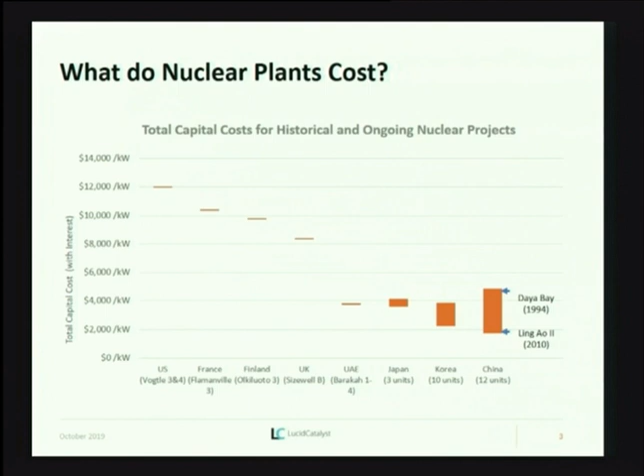So what drives these cost outcomes? Is it because labor is cheap in China or because corners are being cut on safety? Well, our study set out to really understand what drives the cost of nuclear and to establish what, if any, best practices could be transferred to the UK or to the US context. Now, Tony's really helpfully introduced the concept here of the benchmark plant, which, as he said, was based on the EEDB database of tens of plants that were built in the United States with very detailed cost data.

And you can see here that we've given a breakdown of what the high-level costs are, including interest during construction, which for the purposes of our study we set at 7% across all the plants that we reviewed, and we brought all of the plants up to 2017 dollars. But we also have owner's costs, and you can see that big blue piece there is indirect services costs, which are things like, for example, interaction with the regulator, design engineering, those sorts of costs. And then we have labor, we have equipment and materials, and then a small amount of pre-construction costs.

It's worth saying that we didn't include pre-development costs in our study. So, for example, in the UK, the cost of licensing and gaining planning permission to build on a site, those kinds of costs weren't included in our study.

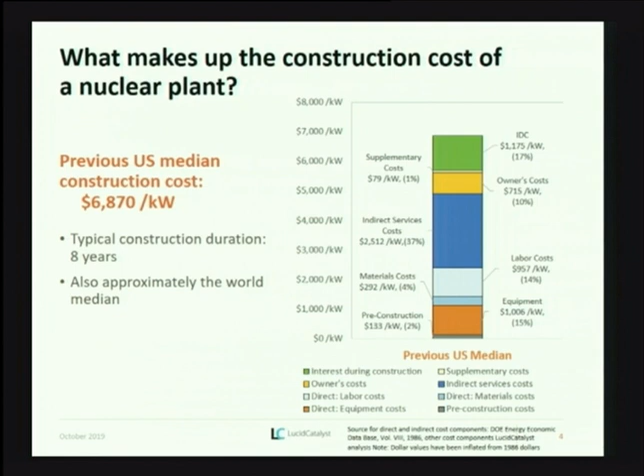We just looked at construction costs, but we did include interest during construction. And actually, it's worth just saying that including interest during construction, even at a levelized cost of 7% across all the plants, is very significant as a driver of cost. And the reason for that is because it depends on how much you borrow and for how long. So your schedule duration and your overall budget will make a very significant difference to your overall cost of financing.

So there's two key insights on this slide now that I'm going to show you. Firstly, first-of-a-kind costs. Now, we've already heard a little bit from Tony about the importance of this. Building something for the first time or doing it in a country for the first time, and for example, after a very prolonged pause, so we would call that like a first-in-a-generation plant, will make it very difficult to implement best practices and achieve high labour productivity. And those are two of the key drivers in the study and throughout the project.

So what you're doing essentially is restarting your industry, and we're seeing that happening today in the United Kingdom, in France, in the United States, in Finland. All of those high-cost plants essentially are first-of-a-kind plants, and as a result we see long construction schedules, we see very high indirect services costs associated with engaging with the regulator and building up the capability and the capacity within the supply chain, achieving the qualifications that are needed, the substantiation of the design. All of that represents a very large investment, especially when you're doing it for the first time.

So you can see here the benchmark plant in the middle, which is about the median for the rest of the world, and then you see the rest of the world plants, and you can see there that actually, interestingly, the equipment and materials, which are the red and the sort of sky blue boxes there, remain broadly consistent across all of the plants. But really the big differentiator is in the interest during construction and the indirect services costs, if you look at the most expensive and the cheapest.

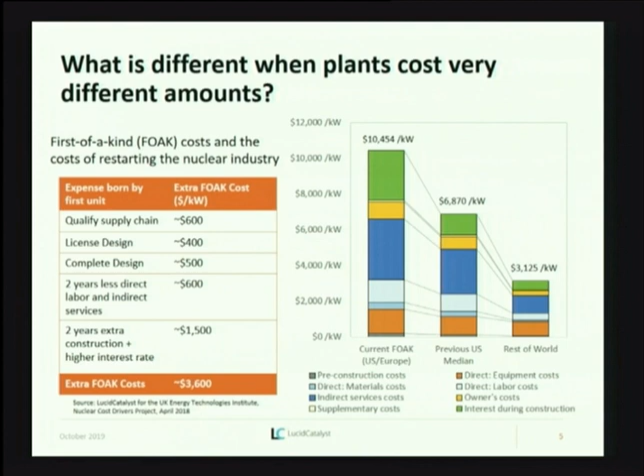So essentially, if you're building an AP1000 in China or an AP1000 in the United States, the cost of equipment and materials will remain broadly the same. What will really differ is your construction schedule and your indirect services costs. And remember, of course, that we levelized the interest during construction, so that wasn't the feature here.

And then even more so, what we see here is the US best experience. Now, from the EEDB database, we took the median experience. But actually, when we went back in to interrogate the data further, what we found was that even the United States was achieving very low cost construction during the height of its new build program. And the significance of this is that achieving very low costs isn't country specific. I've already described how it's not technology specific. You can build an AP1000 in China and the United States and achieve very different outcomes. But actually it's not culturally specific.

The truth is that you can get really good at it in terms of project management, continuity, standardization, having a successful interaction with the safety regulator. And interestingly, a successful interaction with the safety regulator isn't something that we should be afraid of. It's actually something that's to do with having good experience, good judgment, a familiarity with the design, an understanding of the safety case, and all of those result in a more efficient licensing process.

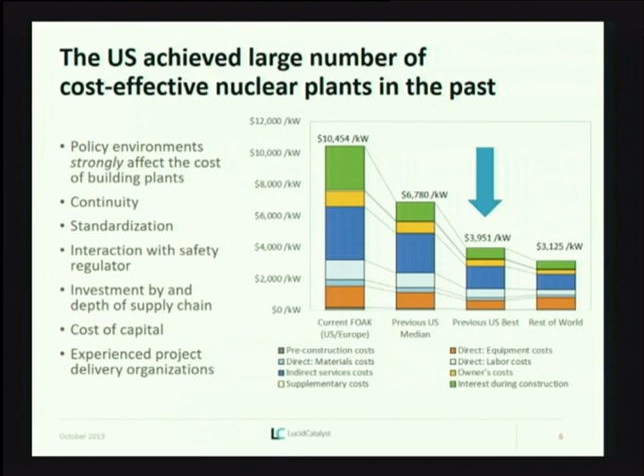Investment in and depth of the supply chain is absolutely critical. The cost for the supply chain and for the developer investing in the supply chain's capability and costs to substantiate designs and to substantiate the safety case of delivering equipment and components is very substantial. Once that investment has been made, if you continue to produce those equipment and materials, then actually you can achieve very efficient cost outcomes. And then, of course, with experienced project delivery organizations, you see an overall increase and benefit of productivity, even in the United States.

So I've described how we can make nuclear cheap through investment in best practices in project management and construction execution; well, we can also make it really expensive. Now, I don't want to dwell too much on these slides because I think Jessica will go into more detail in her presentation here, but we would show some of the data that Jessica's produced where we see very low-cost plants being delivered in the United States and in France.

And then two things happened, Three Mile Island and Chernobyl, and we can see that after those events, those plants that were under construction at the time of those accidents and then underwent very significant regulatory reviews, very substantial design changes midway through construction, ended up with a very significant cost increase.

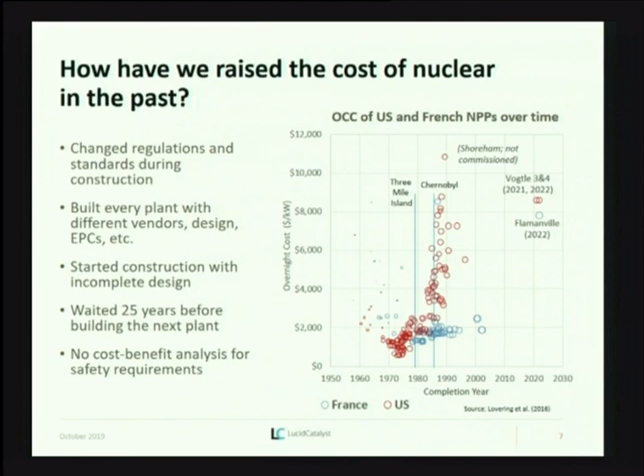So Vogtle is the plant in the United States that's been quite problematic, experiencing very significant delays and cost overruns. But what we're hearing anecdotally is that actually Unit 4 is coming in substantially cheaper than Unit 3, because Unit 3 has really carried the burden of all of those additional costs of setting up the industry, of licensing, of establishing the capability within the supply chain.

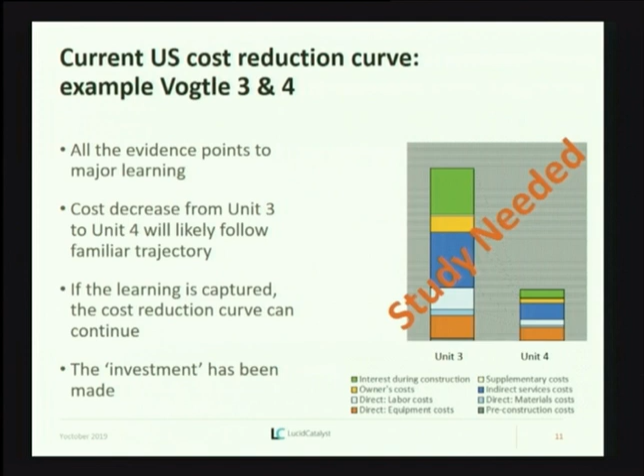We haven't had the opportunity to look into this in detail. A study really is needed. Sorry, I just jumped ahead there.

So this plot, again from Jessica's data, shows how we've actually lowered the cost of nuclear in the past, and you can see here from South Korea and China over the course of their program how they've achieved significant cost reductions from Daya Bay being the first of the Chinese new builds, and then achieving very substantial cost reductions after that by standardizing the design, by investing in the supply chain, by starting construction with a complete design and building continuously.

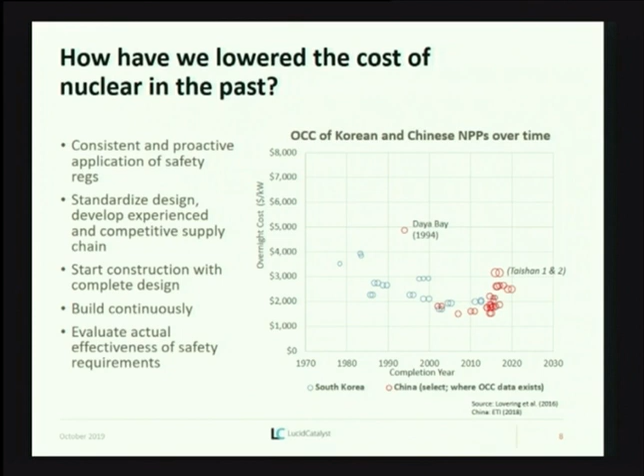Starting construction with a complete design, by the way, if there's one single takeaway from this study, is one of the biggest determinants of a low-cost outcome. All of the high-cost plants that we reviewed started construction with a very low percentage of design completion. And the result of that rippled out into further regulatory investigation during construction, changes on site, delays in developing codes and standards for the supply chain, and ultimately resulting in budget overruns and schedule delays.

So, first-of-a-kind plants are expensive. The best thing that we could do, once we've invested in a high-cost, first-of-a-kind, first-in-a-generation plant, is to build another one. We have to see these first-of-a-kind plants as an investment, and if we do not sequence the subsequent builds, we will lose the capability and the experience that's been gained, the licensing that's been gained, and the longer the gap, the more expensive the next one will be.

And that's really the case that we're making in the UK to the UK government with the build of Hinkley Point C, which by anyone's standard has been an expensive plant, but we ought to see a very substantial cost reduction for the next plant. And here's a case study that illustrates this, which is from Sizewell B, which was the last nuclear plant that we built in the 90s in the United Kingdom.

So our ETI study showed the breakdown of costs that we had from very detailed cost records from the build of Sizewell B up to the blue bar. And then we've since actually added the first-of-a-kind costs that would have also been invested in that plant associated with site acquisition and consents and permitting, the reactor design costs, the cost of licensing, and the additional costs of interest during construction that would have been associated with that.

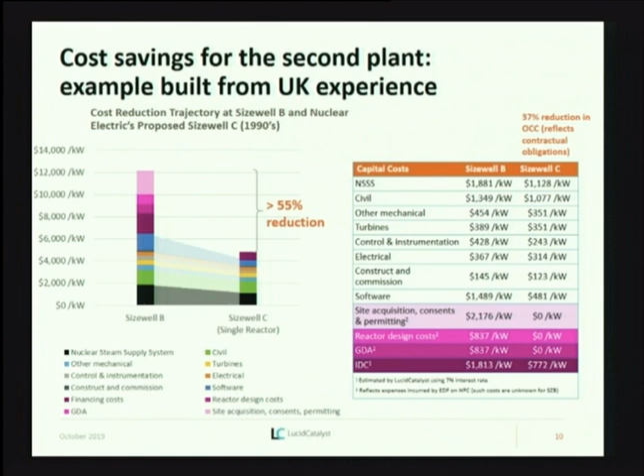Now, that unit unfortunately wasn't built, but it should be a lesson to all of those governments looking at their high first-of-a-kind costs in their countries and deciding whether or not to really maximise that investment by building more plants. Here's another example of a multi-unit program.

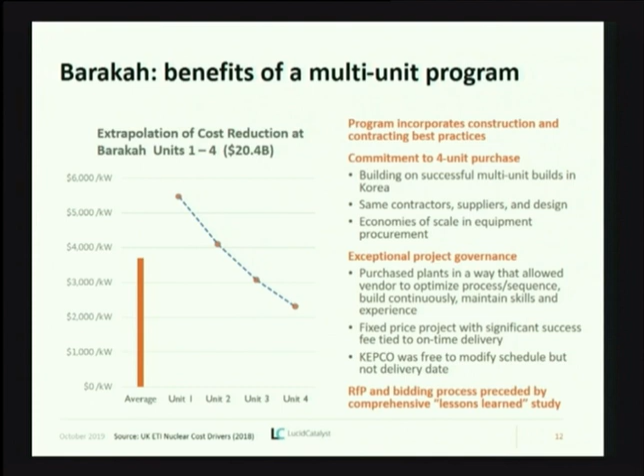Sometimes when we talk about a fleet effect, we think that requires a sort of 10 gigawatt scale commitment from governments, but actually we see a fleet effect even between 1 or 2 units on a single site, or even better, in the case of Barakah, between 1 and 4 units, when you can really start to drive down cost, not only because you're stripping out those first-of-a-kind costs, but you're also starting to really gain the productivity gains and those learning effects within the supply chain and the labour force.

So we know that well-organised programs can reliably deliver low-cost plants. But before I finish, I would just like to highlight 2 additional approaches to cost reduction. So the first of 3, we've heard about improving delivery via a programmatic approach.

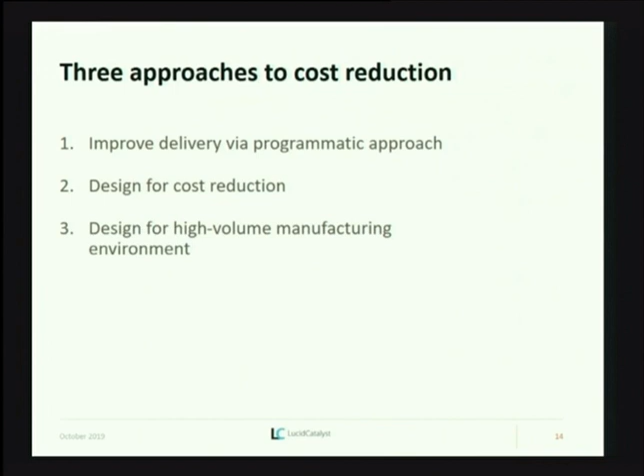We can drive costs down to very competitive levels, even with gigawatt scale, conventionally built, stick-built construction of large light water reactors. And we can do that through continuous building, being disciplined in capturing and disseminating learning, developing a deep competitive supply chain, building as many units per site as possible.

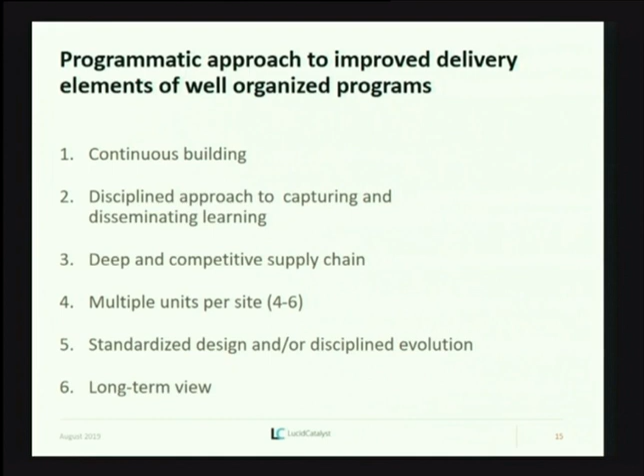In China and Korea, we're seeing 4 to 6 units being built on sites, which is one of the significant drivers of the very low costs that are being achieved in those countries. And then, of course, standardized design and really taking a long-term view. Beyond that, there's other things that we can do to reduce costs on site, such as, for example, seismic isolation.

One of the things that we see, particularly in the UK, for example, is site-specific design. So even when you're intending to replicate your design as much as possible, when you move to a new site, you inevitably need to reopen some of the design case, some of the safety case, which does require additional design engineering, additional interaction with the regulator. Some of those additional costs could be designed out and standardized to avoid site-specific design.

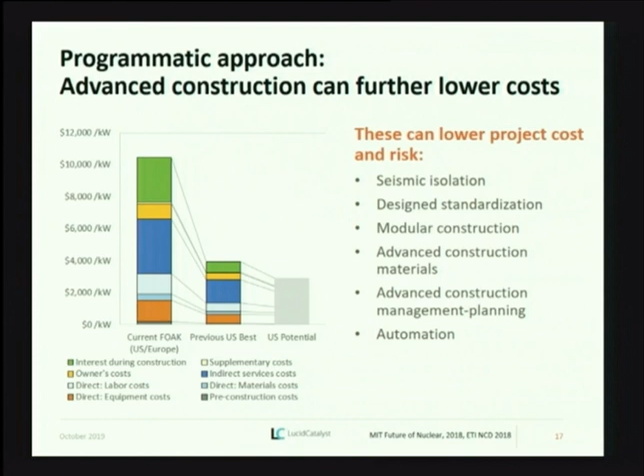We could be redesigning for low-cost delivery for next-generation plants. We're seeing that now in the SMR program. And the SMR plants not only are designing to be factory-built, to be moving from being projects to products, but they're actually designing for low cost.

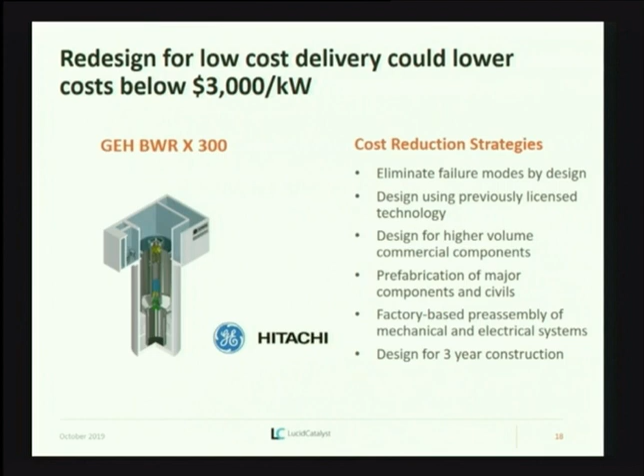This is an example of the GE BWRX-300, which is using as far as possible off-the-shelf components that are very well known, very well demonstrated, and present very little risk in terms of regulatory and licensing, driving out cost and driving shorter construction schedules.

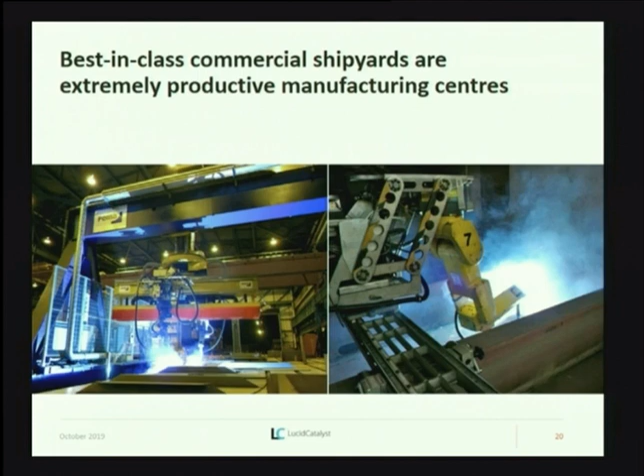We can see this in other sectors that we should be learning from, including, for example, shipyards, which are very productive manufacturing centres. So rather than making these reactors in field, 5,000 guys in a muddy field, why wouldn't we be moving into high manufacturing areas like shipyards that build highly regulated and complex and very large machines?

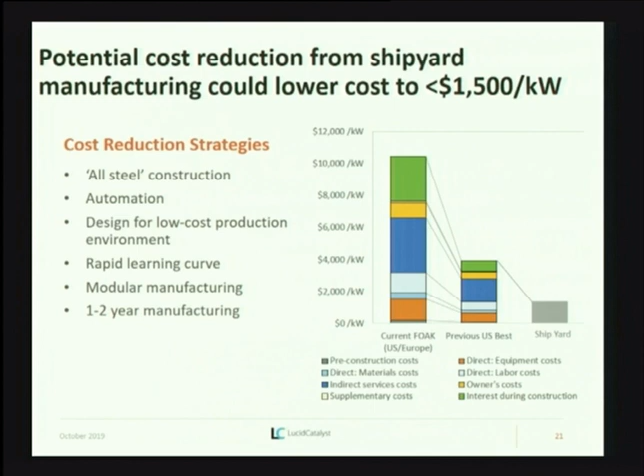So we see potential for very substantial cost reduction through shipyard manufacturing, stripping out costs even further than are intended or well understood at the moment within the SMR space.

And in conclusion, I would say that the largest volume of plants that are being delivered in the world today are actually low cost. There's a very significant gap in the narrative around the cost of nuclear, which is really confined to the context of a small number of first-of-a-kind, first-in-a-generation plants being built in the United States and Europe.

So we need to broaden our horizons and learn from the success that we're seeing in other parts of the world and understanding how many of those best practices are transferable into the United States and the UK. These are very well characterized pathways to lower and potentially very low costs.

And I guess I would leave you with the question with which I started, which is, what would we do differently if we decided to support nuclear with the full range of options that we already use to support renewables? Renewables didn't start out cheap.

They got cheap through a very coordinated and coherent effort by industry, by government, by investors, to really identify what it was that was driving costs, and then working hard to strip out those cost drivers and deliver the successful low-cost deployment that we're seeing today, and ultimately achieving investor confidence, achieving government's confidence. We can and we should be doing the same thing for nuclear.